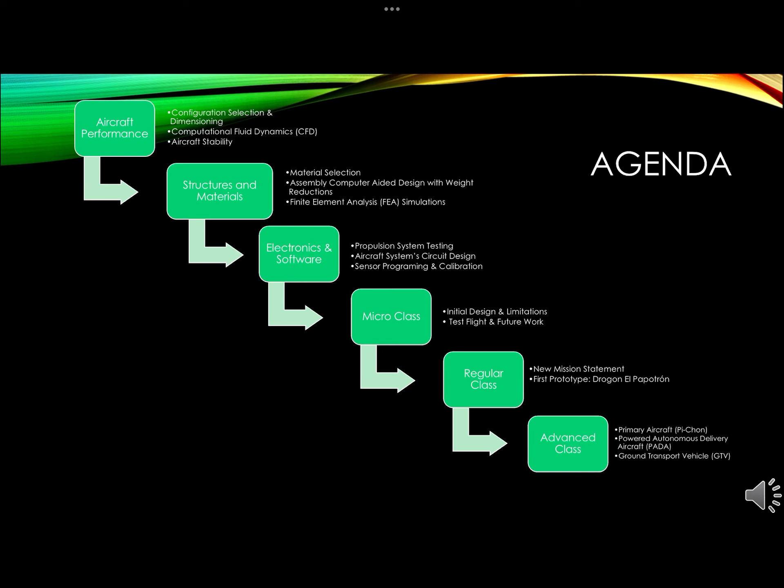The main goal of the aircraft performance department is to ensure a successful and stable flight. This is done studying aerodynamic behavior to optimize the aircraft's exterior geometry along with its control surfaces. We implemented tools like a normalized decision matrix and configuration comparisons.

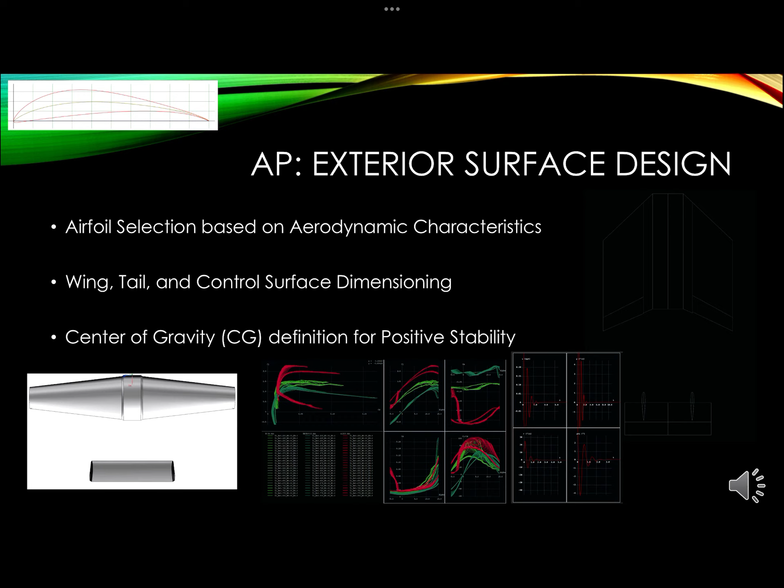On top of that, our department oversaw visual critique of the airplane's behavior at each test flight by taking into consideration dynamic protocols like takeoff, climb, cruise, stability, descent, and landing for possible improvements with redesigned procedures and iterations.

To validate our designs before manufacturing them, we conducted a series of analyses like simulating the aircraft inside a digital wind tunnel using CFD like STAR-CCM+ or ANSYS Fluent. On top of that, we also tested for static and dynamic stability to ensure it's positive in lateral and longitudinal modes. Good afternoon, everyone. My name is Hector Arcelay.

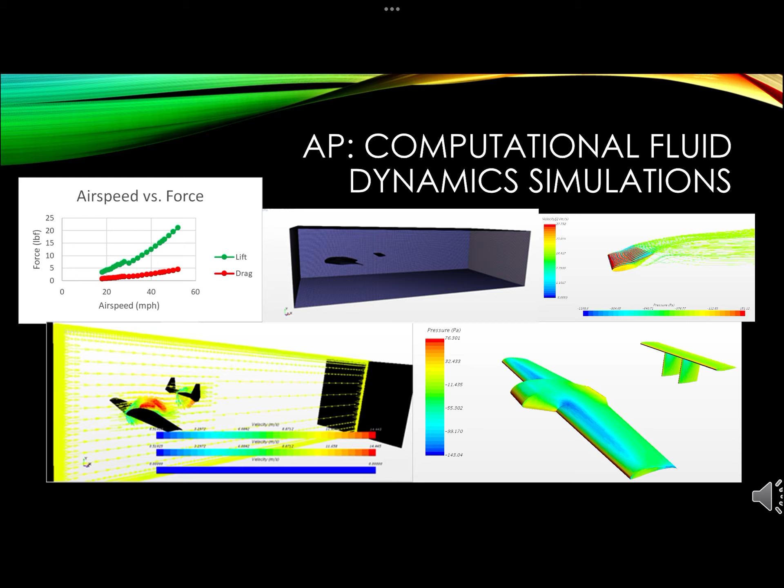I'm the Structures Department leader, and I'll be telling you about what we did in the Structures Department during this semester. Our design process began since the summer, where Structures Department members were assigned each to different disciplines of structural analysis. Various members of each aircraft were assigned to different research topics so that there was at least one specialist of each topic in each aircraft.

First, we studied the mechanical properties of various possible woods, 3D printing filaments, and other carbon fibers that we could use in our aircraft. In addition to this, we looked into how to properly carry out mechanical calculations for wing spars, booms, and landing gears using different materials, and how to properly confirm these calculations using finite element analysis.

The load analysis for the wing spars is simplified into only a distributed load of the lift produced by the wing. The distributed load can be found using Schrenk's approximation. This method uses values of aircraft speed, loading factor, two-dimensional lift coefficients, and the weight of the wing to approximate the lift generated through the ribs along the wing.

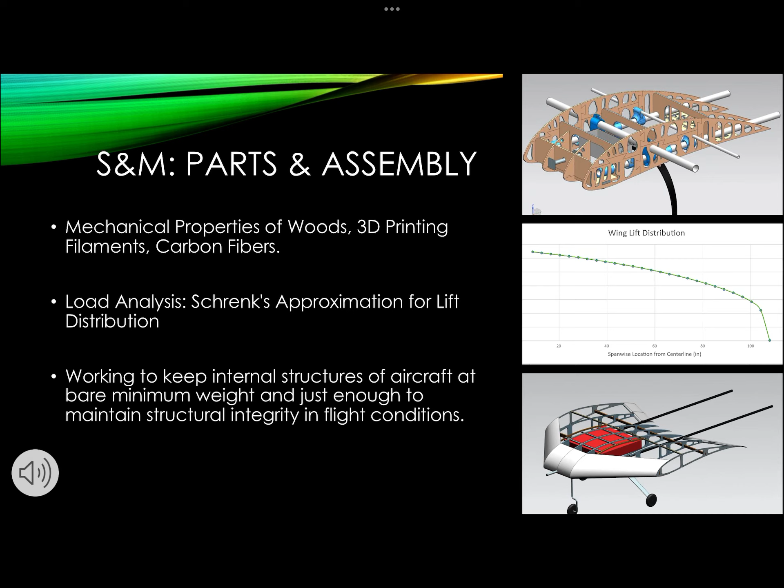The load analysis for the booms comes down to the downforce produced by the empennage, which can also be calculated using Schrenk's approximation. These values were confirmed with the aircraft performance department using CFDs. After this, we used the properties for mechanical calculations for spar and boom sizing. The materials that most favored our airplanes are orthotropic or anisotropic materials.

And while we can assume the material to be isotropic using data found from testing online, we went the extra mile to find a more precise way of proving our dimension selection was correct. The wood group members created a new material library in Workbench that includes the properties of wood along the three axes, enabling them to model wood in Workbench.

The carbon fiber group members were successful in modeling our carbon fiber spars and booms using ANSYS ACP software, which essentially allows them to manufacture a carbon fiber part ply by ply with their respective angles of orientation. I'm very proud to say the results of the analysis provide negligible discrepancies with less than 2% margins of error.

Furthermore, the topology research group, using ANSYS topology software, were able to create finite element analysis guided weight reductions. The ANSYS software analyzes the stress a given part experiences and shows where it is safe to take off material without compromising the structural integrity of the part.

Internal structures for wings and fuselage consist primarily of ribs and stringers to keep the aerodynamic shape of the aircraft, and we only employ solid structures for landing gear and motor attachments. And this has been a general summary of what we did in the structures department during this semester. I'll leave you guys with the electronics department leader.

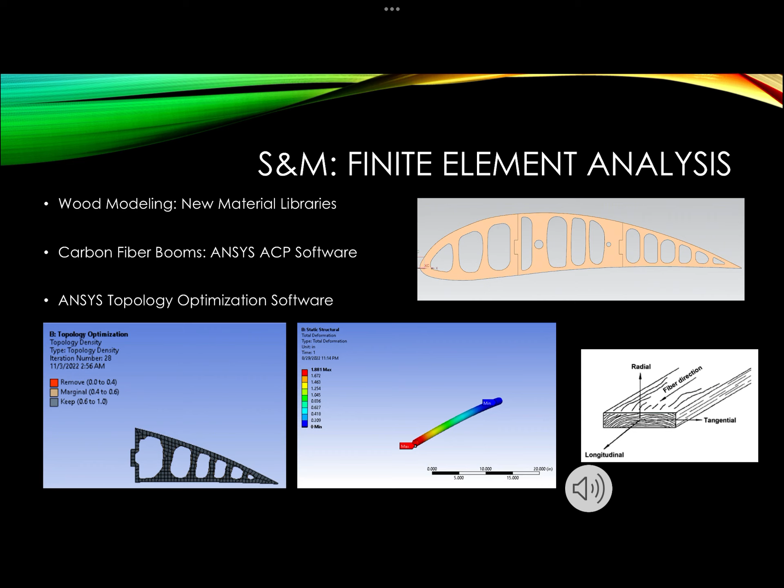The electronics department has been working with the aircraft system circuit design and integration, the propulsion system testing, and this year we are using anti-gravity motors for the regular and advanced class with carbon fiber propellers.

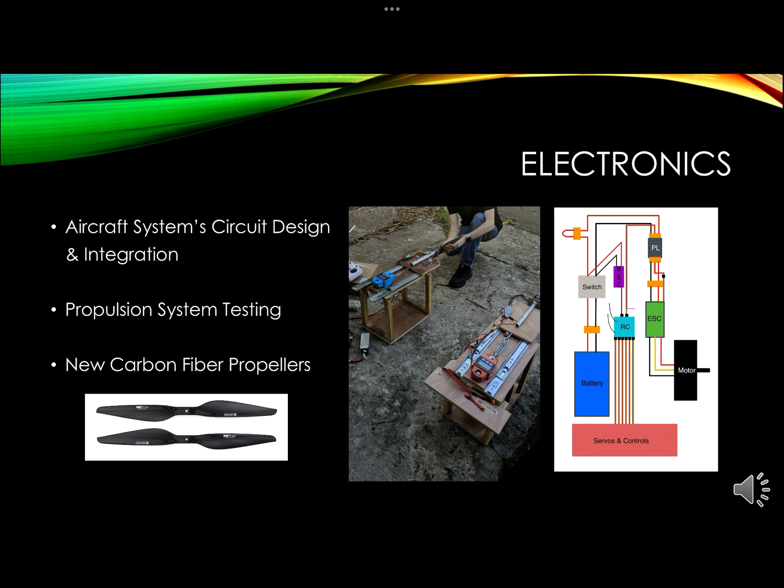Good afternoon. My name is Rodrigo Pagan. I am a Structure and Materials Department member of the Micro Class aircraft, and today I will be presenting the work done throughout the Fall 22 semester. Now I will be talking about the mission statement.

Firstly, I will be talking about last year's mission, which was to take off from an 8-foot-long platform, and for the aircraft there was a wingspan limitation of 48 inches, and an electronic configuration limitation, or the power limiter, of 450 watts. Additionally, another part of our mission is that we have to load pizza boxes. It could be 12 by 12 by 2 inches, and metal payload.

For this year, the rules were not supposed to change. However, the competition decided to modify the rules last September. The change was a drastic one, decreasing the wingspan from 48 inches to 36 inches, a 12-inch reduction. This change greatly set back the team since a preliminary design was brought up last year with the 48-inch wingspan. Nonetheless, we were able to deliver a new design for the new dimensions.

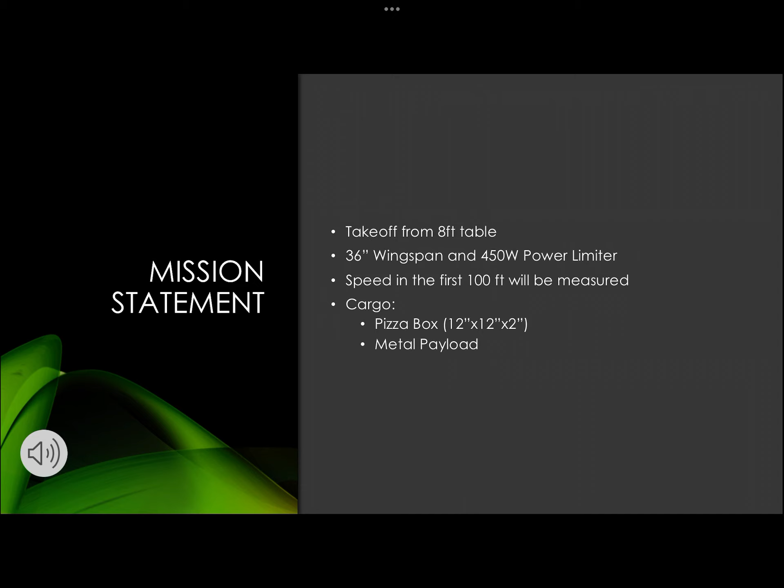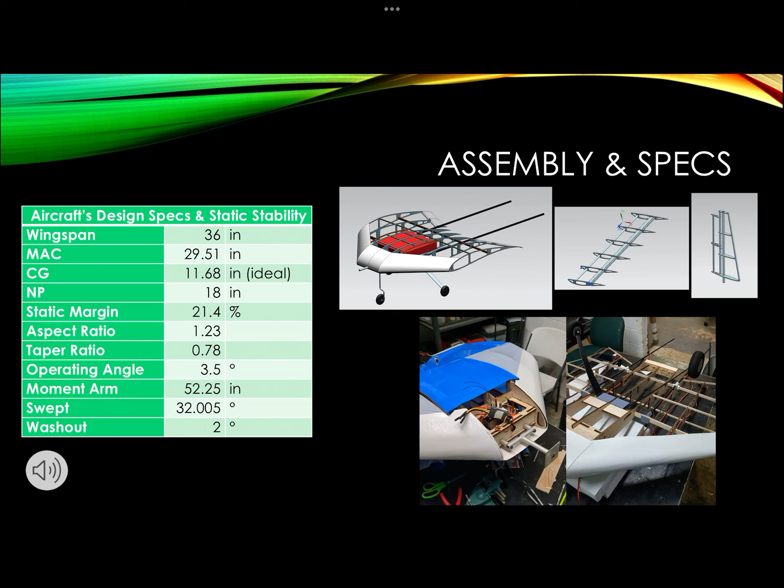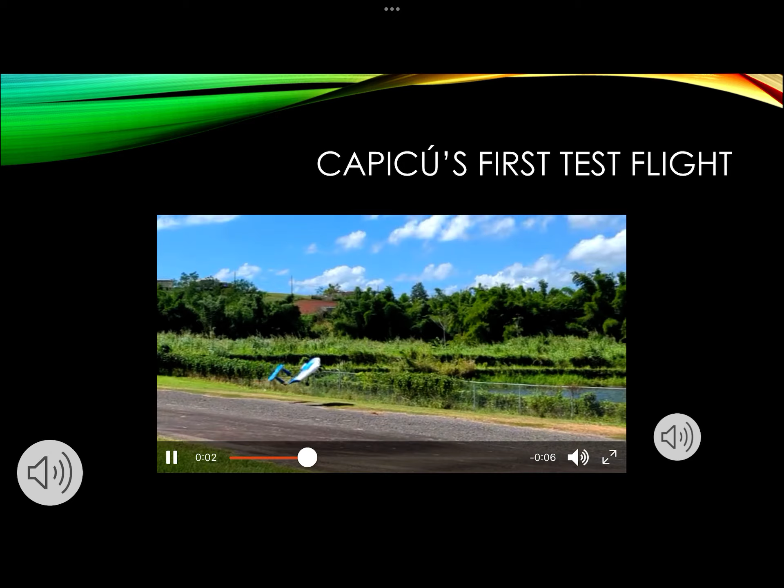Last November, we were able to carry out our first test flight, where we obtained enough data to help us analyze our current design in order to optimize the design as well as the manufacturing processes and materials. Let's watch this video to elaborate on this. Once you're done watching the video, here I will explain what happened during the test flight. The plane goes down due to a structural failure in the motor mount. This was because we did not have time to send the motor mount to weld, so we went to plan B, which was to glue it, but it was unsuccessful, as you clearly saw.

However, the plane had a successful takeoff, and despite what happened, we were able to get a lot of additional information. For example, we deduced that the quick takeoff performance of the plane was affected by the fact that the downforce made by the empennage was too much, which led the plane to have to reach a higher speed than expected in order to create the necessary lift to take off.

This is because the plane managed to take off only when the horizontal control surface was deactivated, which was activated throughout the takeoff trajectory. However, we think that since our horizontal is an upside down airfoil, already in its normal position it is creating downforce, so it might not be necessary to activate the elevator to perform the takeoff, which was the opposite of what was happening here. We will confirm this in the next test flight, which we hope will be before the end of the year or at the beginning of January.

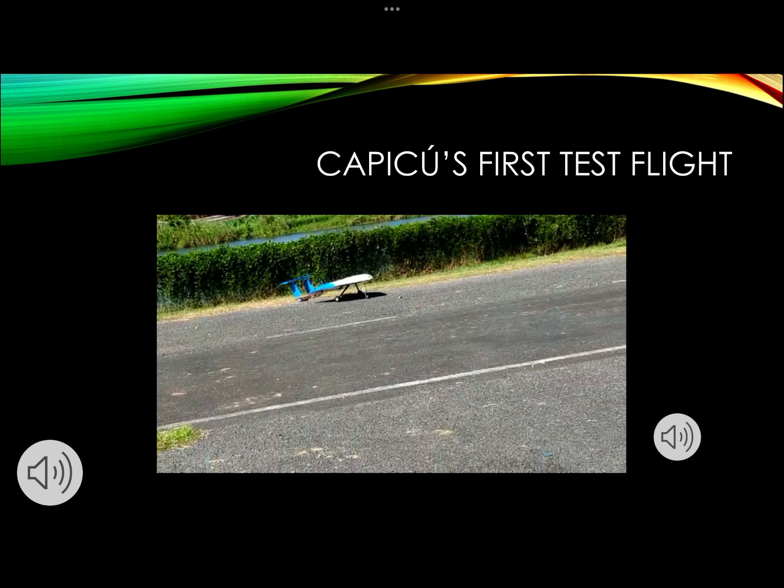For future work, we must replace the balsa main spar of the aircraft with a carbon fiber one in order to improve its rigidity without greatly affecting the weight. The main spar is basically one of the most important parts of the aircraft because it receives the loading of the lift of the wings, the booms, and the rear landing gear. We are also in the process of redesigning the empennage to have better takeoff performance data and to be able to confirm our hypothesis from the past test flight regarding the horizontal.

We were also in the weight optimization phase, reducing the weight of some areas that we noticed could be improved and using better materials in other parts where necessary. All these optimizations and modifications that I have just mentioned will be tested on our next test flight, which is pending. That will be all for the presentation.

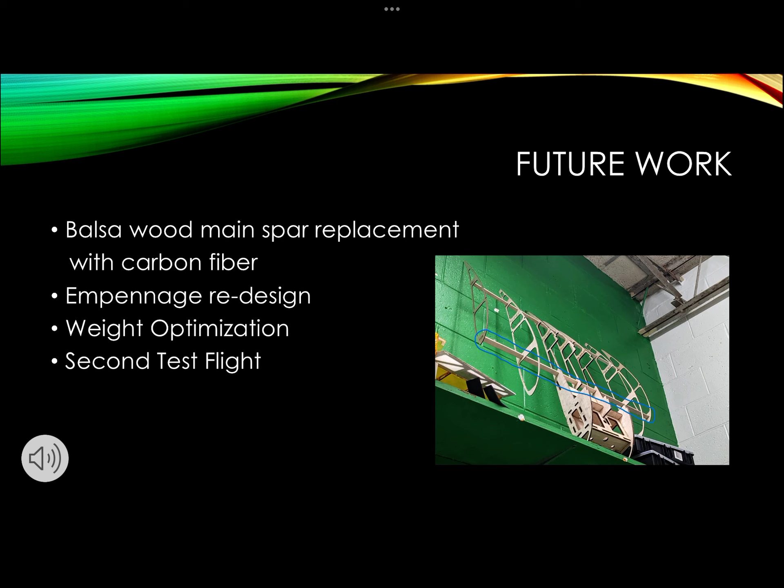Now we will be going over the regular class aircraft. This year, the regular class was subject to a complete rule change. Prior to the arrival of the rules in September, the team focused on thorough research in all departments to ensure a plan for any new change. Once the rules arrived, the mission score formula was evaluated considering the following factors: takeoff in 100 feet or less, wingspan, component sectioning, metallic payload, and maximum total weight.

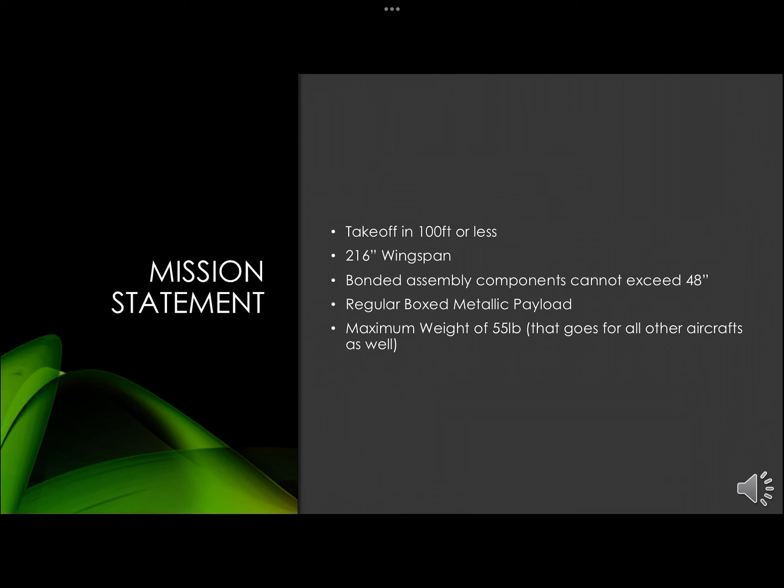This year's aircraft has a 100-foot takeoff limit, a minimum wingspan of 120 inches and a maximum of 216 inches. Bonded assembly components cannot exceed 48 inches. It will carry a regular boxed metallic payload and has a maximum weight of 55 pounds in total. Here you can see the scoring equation.

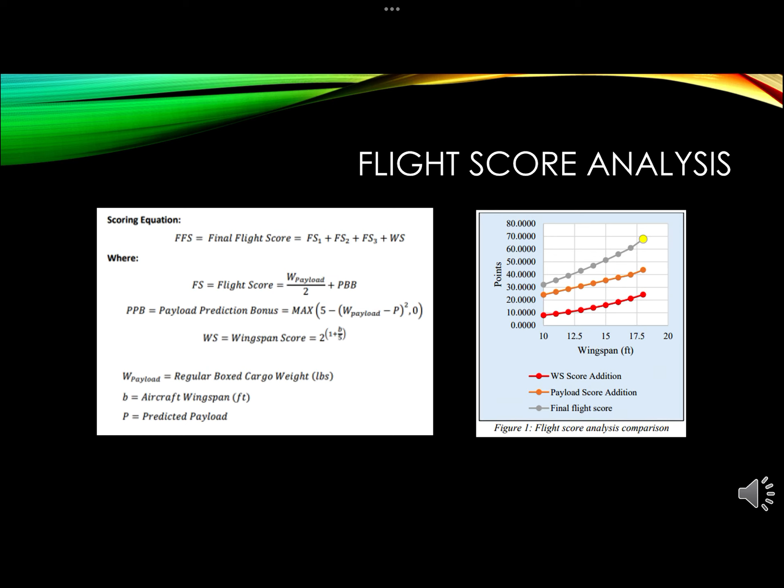This equation was analyzed to determine the best configuration for the aircraft, and based on this analysis it was determined that we could get more points by having the maximum wingspan. So that is why we worked on the design that we will be showing now. Here you can see all the components, the CAD for the different components of the aircraft.

You have the empennage, the fuselage, then below that the wings. The complete specs of the aircraft are displayed, showing a great static margin of stability with a relatively high aspect ratio to achieve better aerodynamic performance. The slight dihedral was added to support the structural design since the wings have a combined airfoil design.

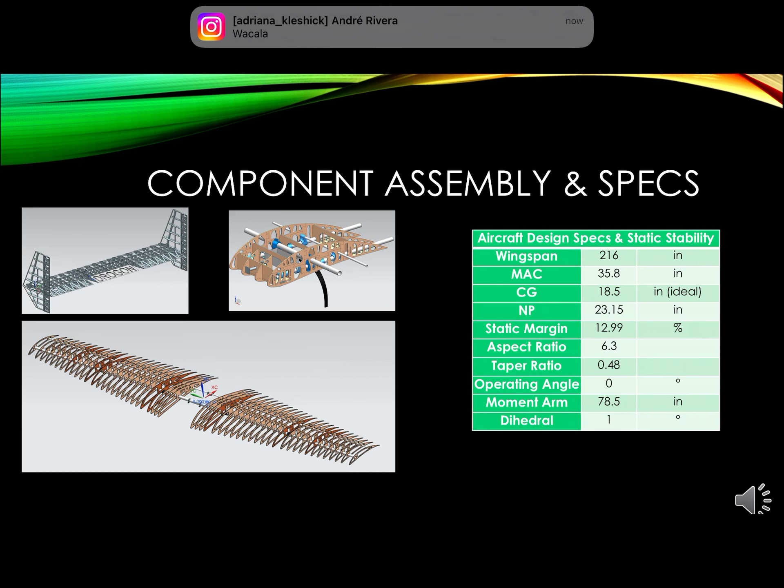The fuselage will be mainly held up by an aluminum skeleton since the booms will go all the way to the front to provide a structurally sound design. The landing gear for the aircraft will be acquired from a manufacturer to ensure correct support at a 3-point landing gear. The empennage will be 80 inches long.

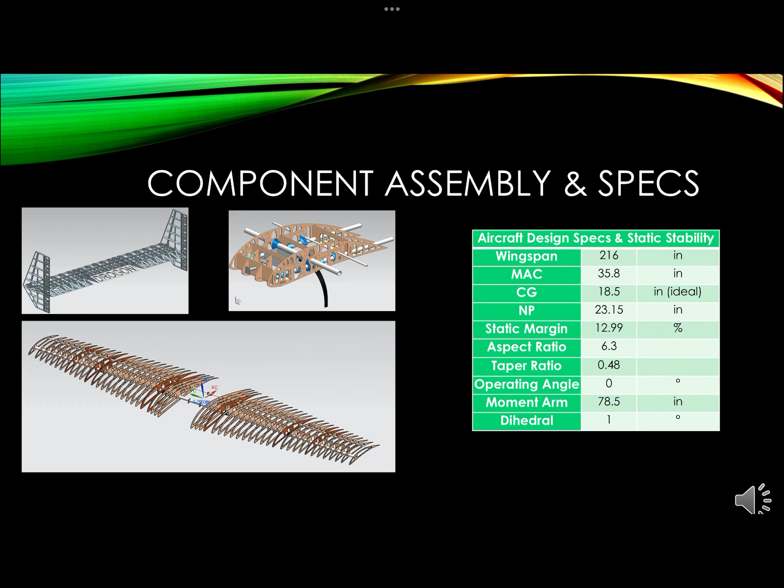This length, chord, and height are this large since they were the best option to correctly locate the center of gravity while still maintaining a good longitudinal stability. This will compromise a bit of the lateral stability, but will compensate with a stable flight. As a final view of the aircraft, the full assembly is shown here.

The plane will be sectioned as seen in 4 sections of 42 inches and a section of 48 inches, which is the limit. The empennage will be divided into 3 sections of 27 inches. The booms will also be modular to comply with the 48-inch maximum section rule.

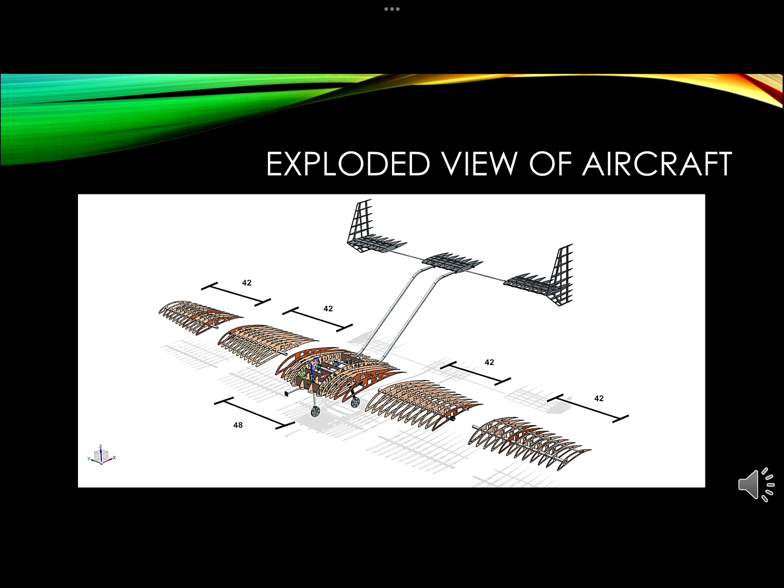The plane is estimated to lift 55 pounds of total weight while carrying approximately 28 pounds of payload in 97 feet, achieving the desired performance. For future work, we will be finishing the manufacturing that has started, and we will have our first test flight.

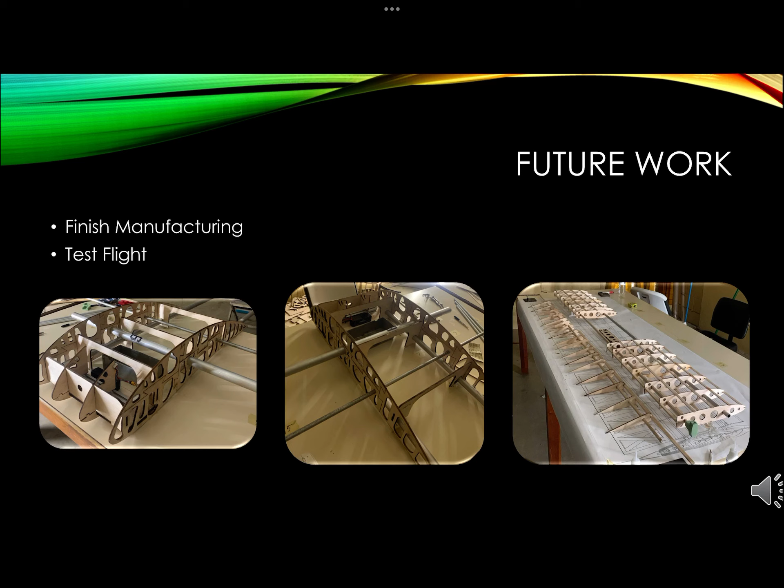Now we will be going over the progress of the advanced class aircraft. This year's advanced aircraft has to take off from a 400 feet runway, has a 120 wingspan limit, needs to use a 750 watt power limiter. The payload is water, and it must deploy a powered autonomous delivery aircraft named PADA to land on a random pinpoint.

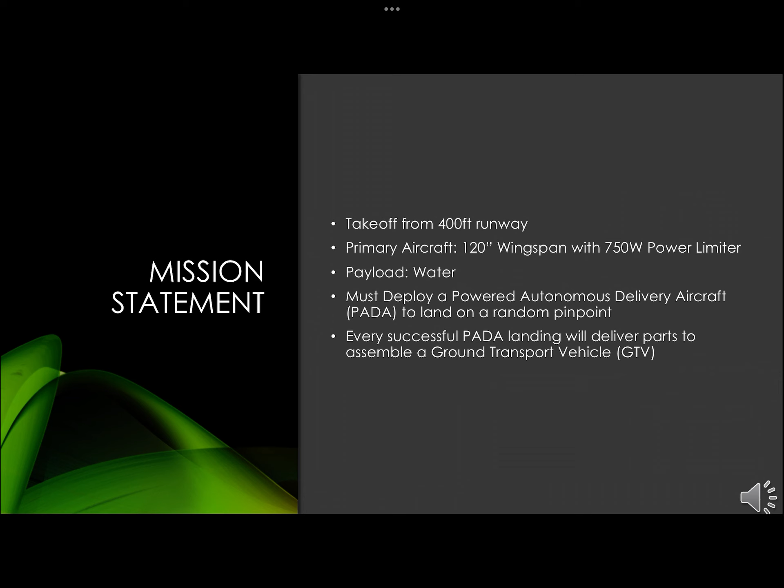And every successful PADA landing will deliver parts to assemble a ground transport vehicle that will transport the water from the primary aircraft from one location to another. In this slide, you can see the scoring equation given by the competition and the equation for the bonus. This equation was analyzed to then determine the optimal configuration in terms of the payload that we were going to be taking in water and the points that we could get from that.

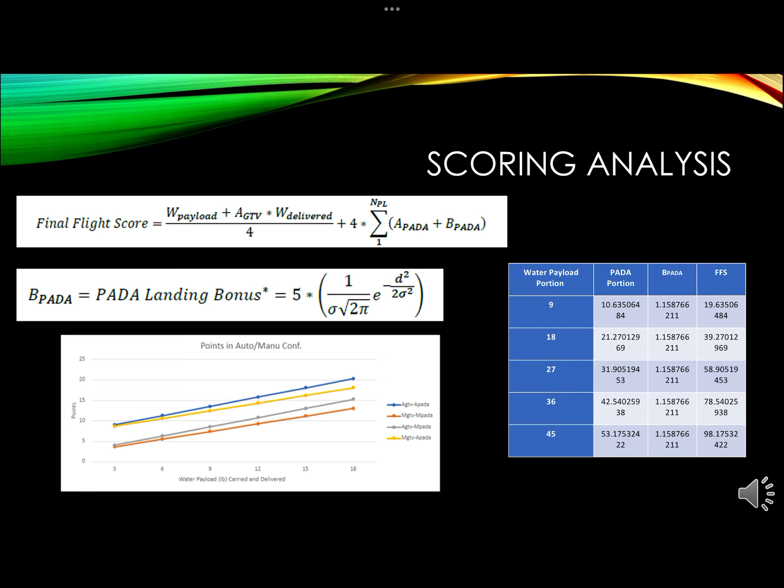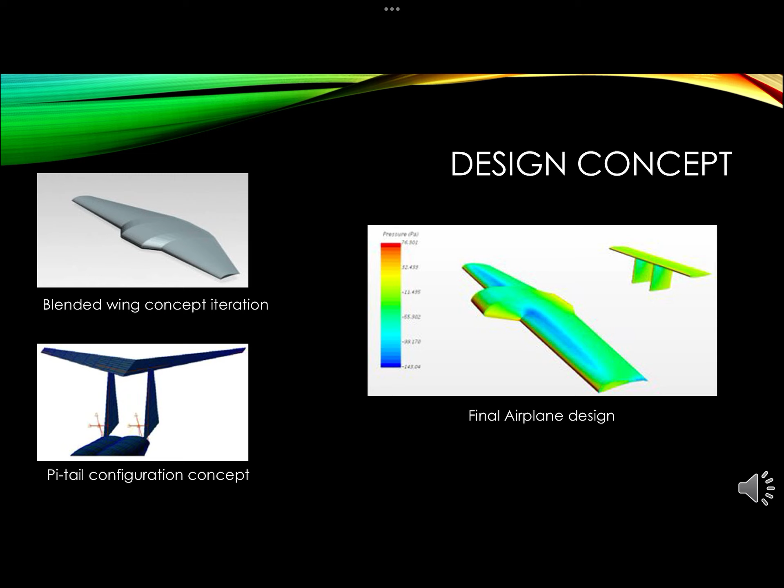This year's aircraft will have a blended wing concept and a pi-tail configuration. Here you can see the final airplane design. Here you can see the CADs for the different components. First we have the wings, then the fuselage, and then the empennage.

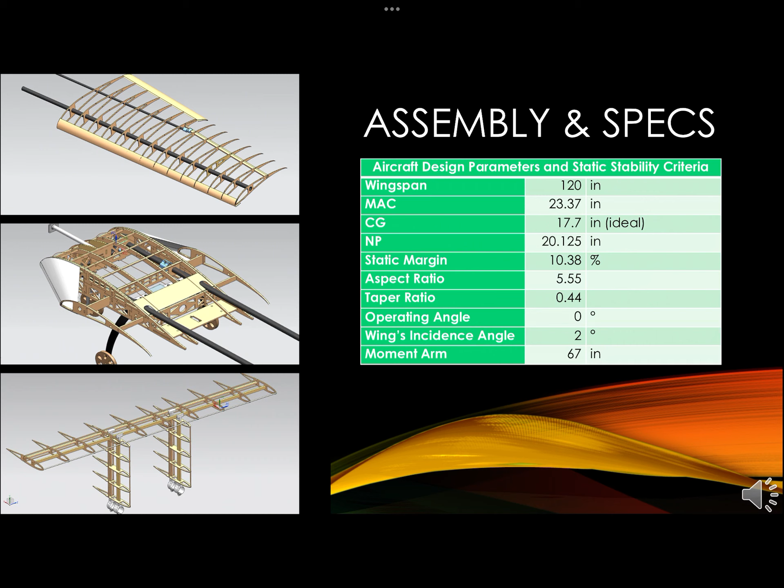And some of the most important parameters would be the wingspan of 120 inches, the center of gravity, which is placed on 17.7 inches, and the wing's incidence angle, which is 2 degrees, and the moment arm, which is 67 inches.

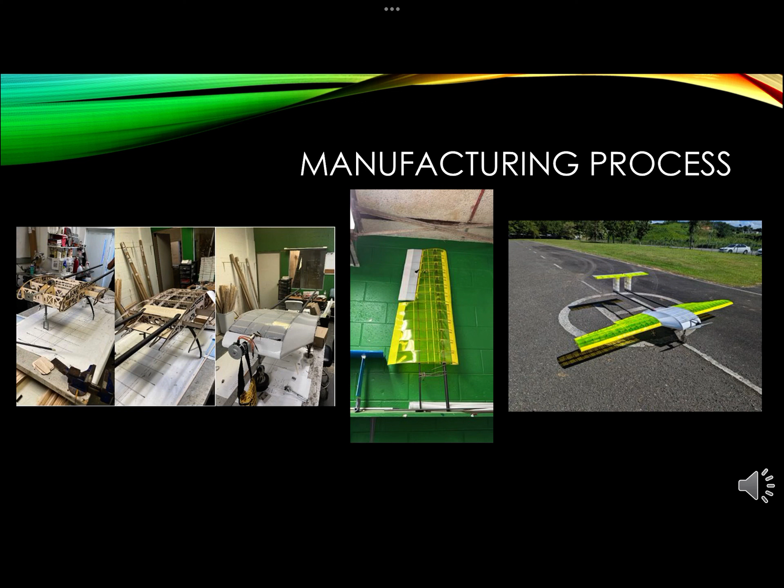Following up with the PADA and GTV design, also known as the Powered Autonomous Delivery Aircraft and Ground Transport Vehicle, throughout the semester, stability analyses were done in order to ensure our design parameters would be optimal for flight testing. However, as you can see from the photos in the slide, the first picture on the top left was our first prototype, and our actual prototype is the one on the right.

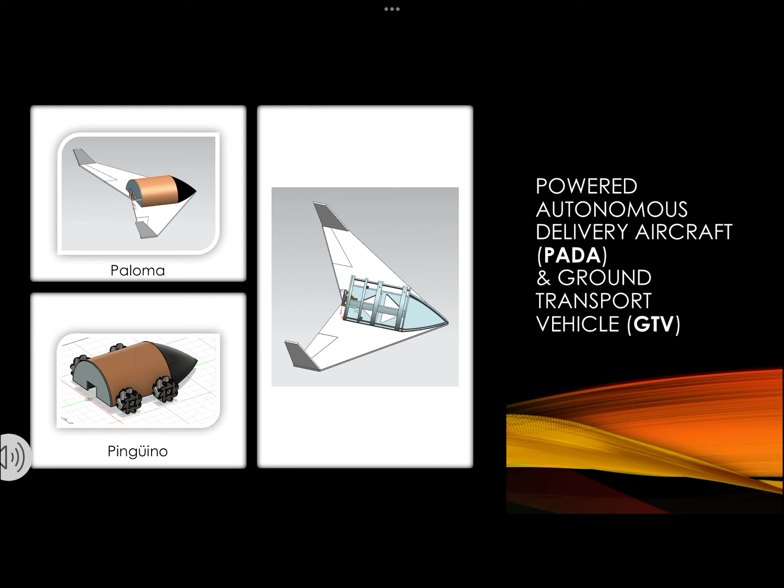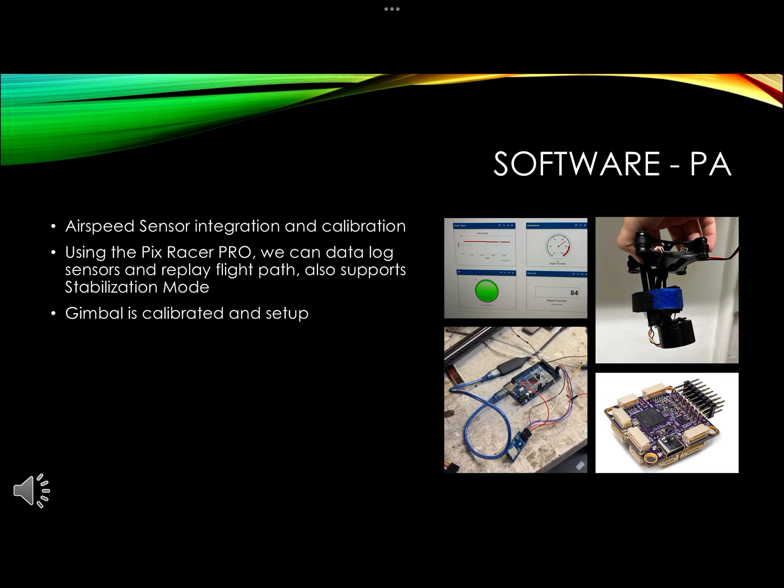And finally, a gimbal which is being set up and calibrated. This will help the aircraft do all the required parts of the mission in terms of collecting data, showing the data on the screen, having a better flight, and also helping the PADA land on the required location.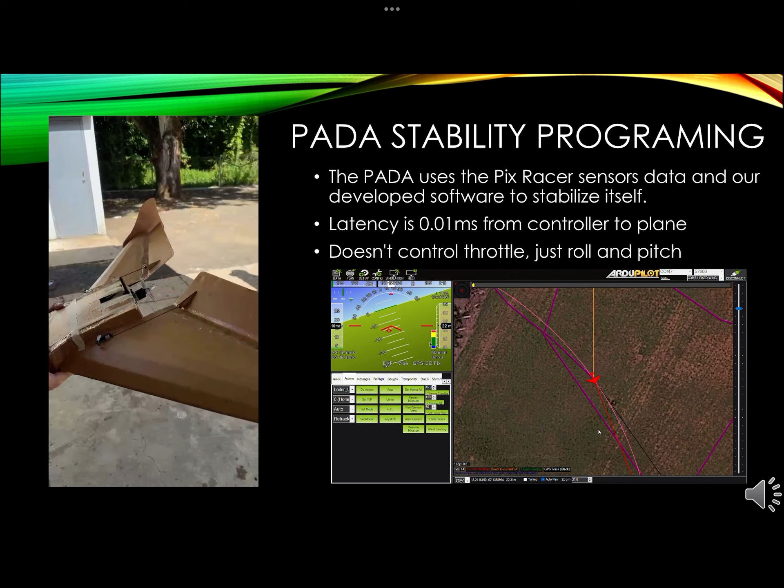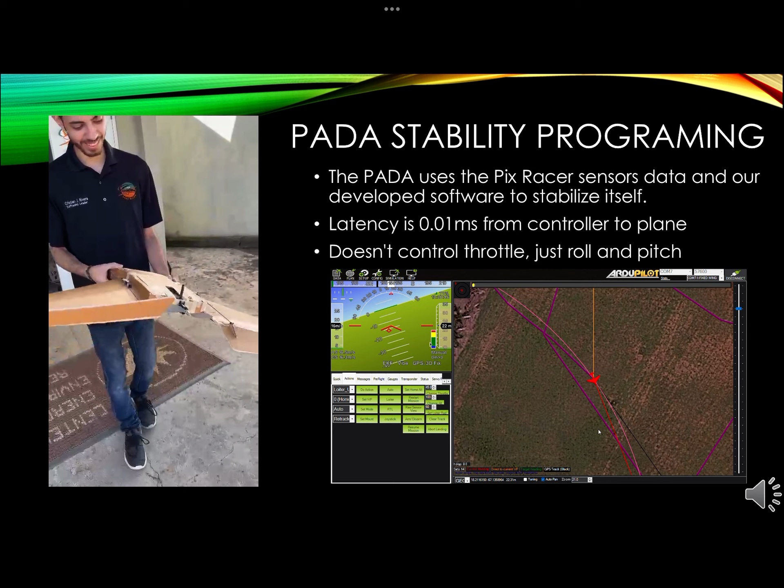The PADA then uses the PixRacer sensors' data to stabilize itself, and with just roll and pitch, it will land on the desired location.

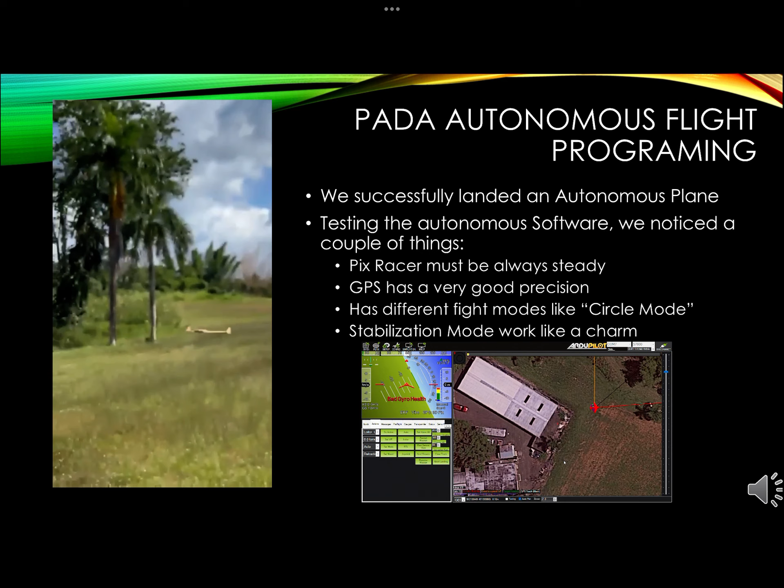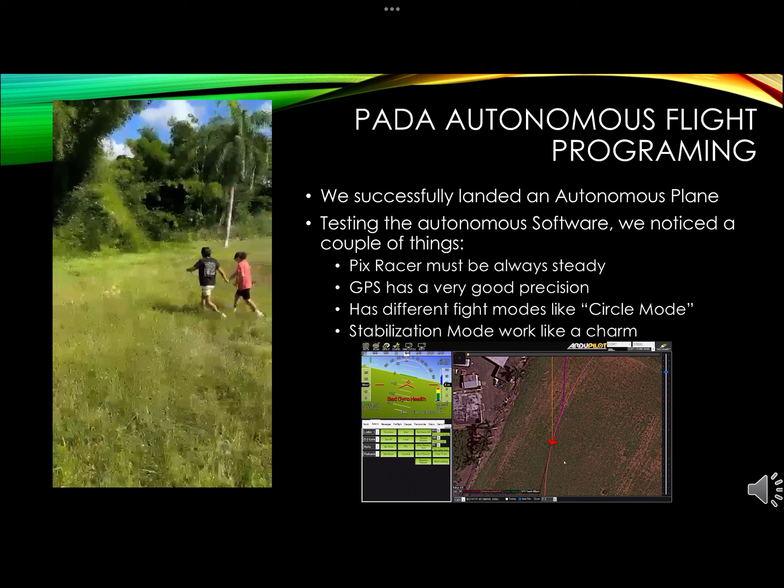The software department has also been helping with other aspects of the team, like the website. We now have the updated URL with the new team's name, and the website is up to date. We also have been working on an airflow Python script. This facilitates airflow calculations and has assisted in providing algorithmic assistance to other departments.

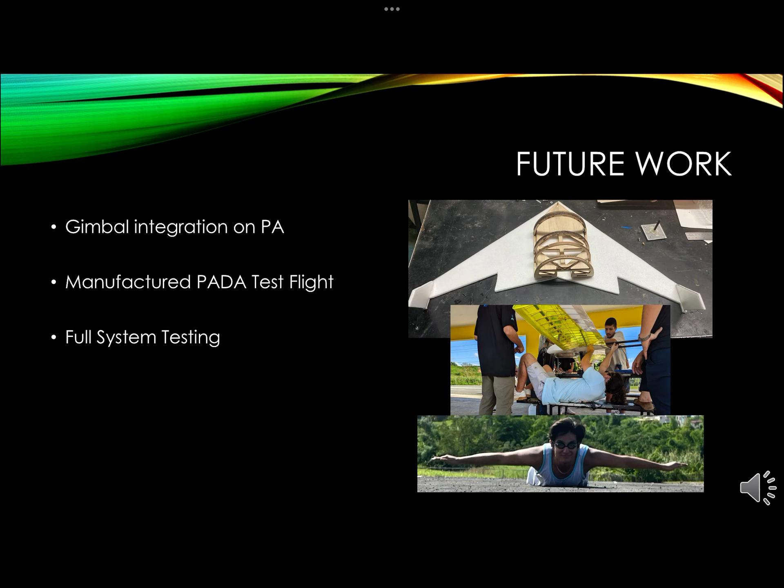For future work, we will be integrating the gimbal to the primary aircraft. We will complete the PADA manufacture and test flight, and we will run a test flight with all the systems.